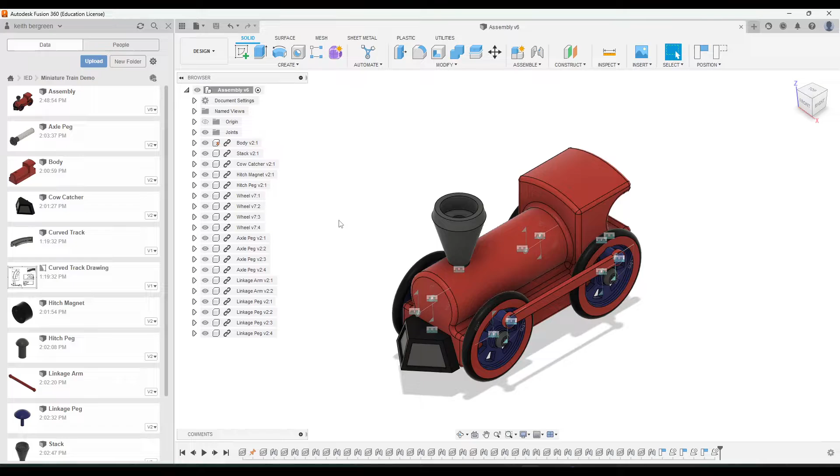So what I'm going to do is go up to File and go to New Design, and then I'm going to go ahead and save this as a straight track assembly.

Okay, and what we need to do is bring in one of our straight track pieces. I'm going to go ahead and click OK here, and then let's go ahead and ground this piece since this is our first one. This is just a 12-inch singular piece of track. Let's go ahead and get at least a couple more pieces on here so that we have a longer track.

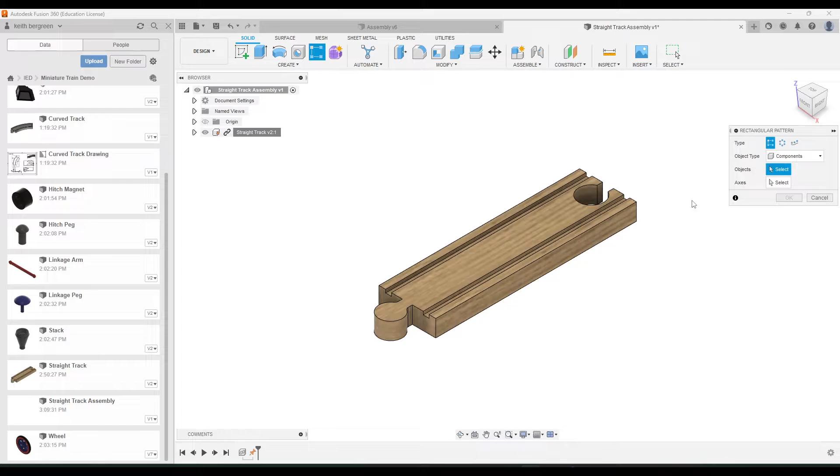So what I'm going to do is go up to Create, then down to Pattern, and then Rectangular Pattern. Under Object Type, make sure Components is selected. For our objects, I'm going to click on the track piece. And then for the axis, I'm going to zoom in here so you can see it, but we want to click on the axis that is going this direction, which in this case is the y-axis for me, or the green line. So I'll click on that.

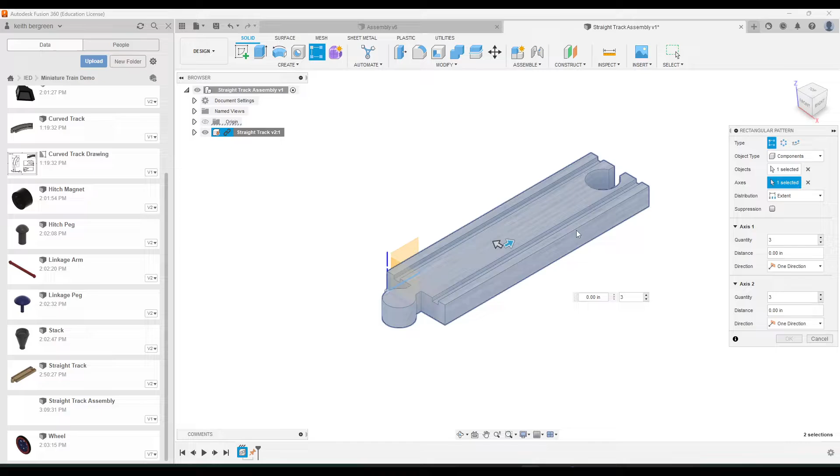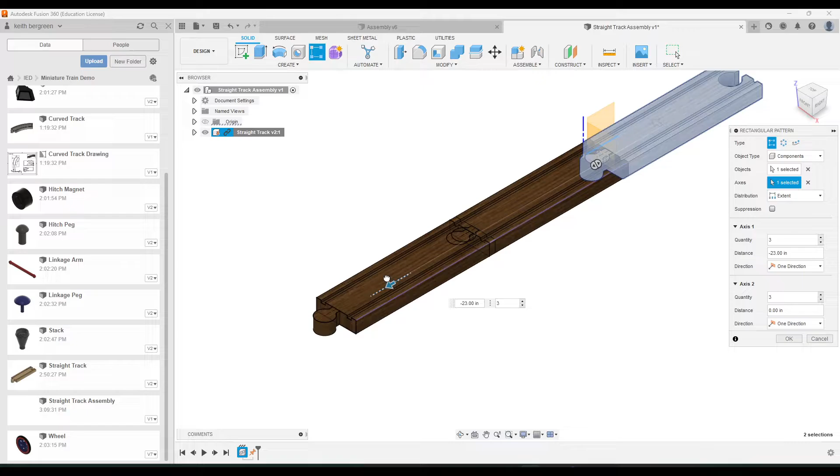By default, it's going to select 3 total, including the one we have. If I click this arrow and start to drag them, you can start to see the track pieces. But what you want to do is drag the pieces out to the end where this piece will end. Since I have 2 more, it needs to go out 12 inches, and then another 12 after that, so 24 inches total. You'll notice that one will snap together to the one we already have, and these two will snap together here too. Then just go ahead and click OK.

Now, one thing you'll notice is this puts them together and it looks like they are connected, but if we click and drag one of them, you'll notice they are actually not constrained to each other. We still can't move this one because it's grounded, but these other two are able to freely move. So I'm going to undo so that one moves back.

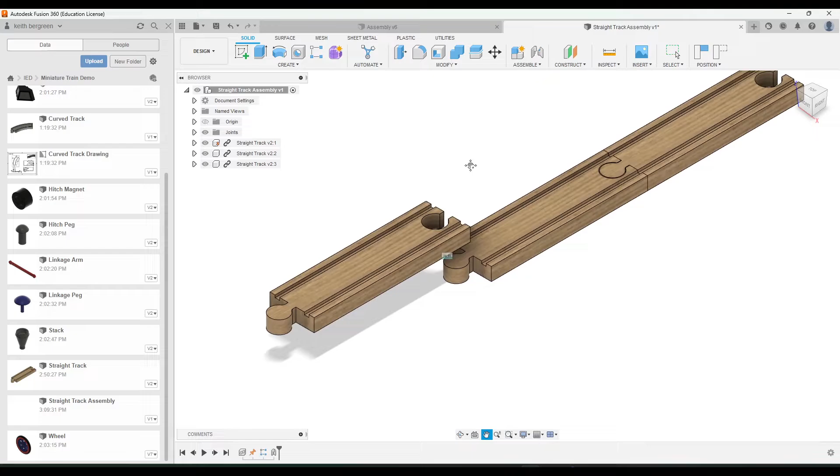What we're going to do is go up to Assemble, then down to As Built Joint. Here we can click on our starting piece, and then this next piece, and that will automatically apply a rigid constraint to these two pieces as they are sitting right now, which we know are correctly positioned relative to each other. We just need to lock them in place. So that's what this is going to do.

So now you'll notice we can't move either of these pieces. We can still move this one though, so we need to do the same thing for this bottom piece. Let me undo to move that back. Go to As Built Joint, click on those 2 pieces, and click OK. Now you'll notice that our track piece cannot move at all. Okay, so we'll go ahead and save that.

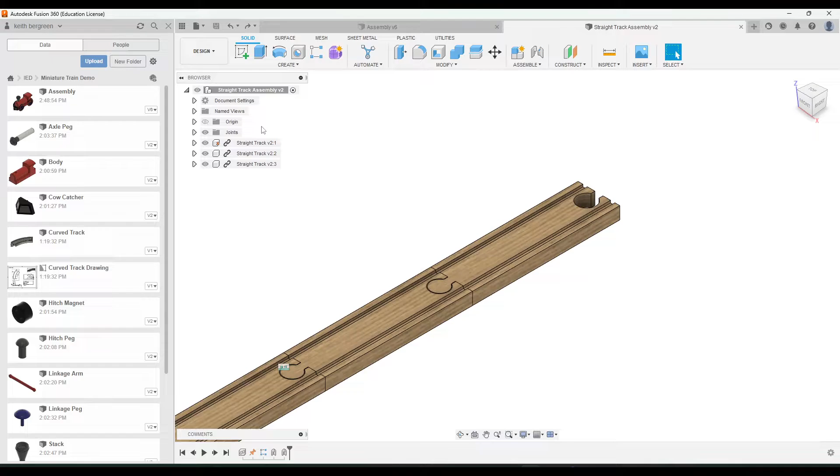And then let's go ahead and bring our train assembly in. So I'll click and drag that in. Oh, let me undo that—I don't know what just happened there. Click and drag that in again.

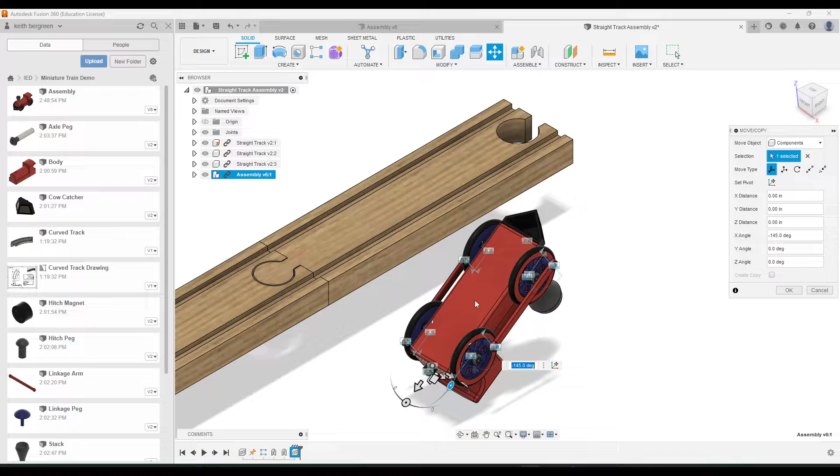So what I'm going to do is just drag it, and we're going to position it somewhere here in this empty space, not on top of the track. One thing that will be kind of nice is we're going to have to click on the bottom of the train, so if we flip the train kind of upside down—it doesn't really matter what angle—just some angle so you can see the bottom, because we're going to need the bottom surface of the train for a joint. So go ahead and click OK like that.

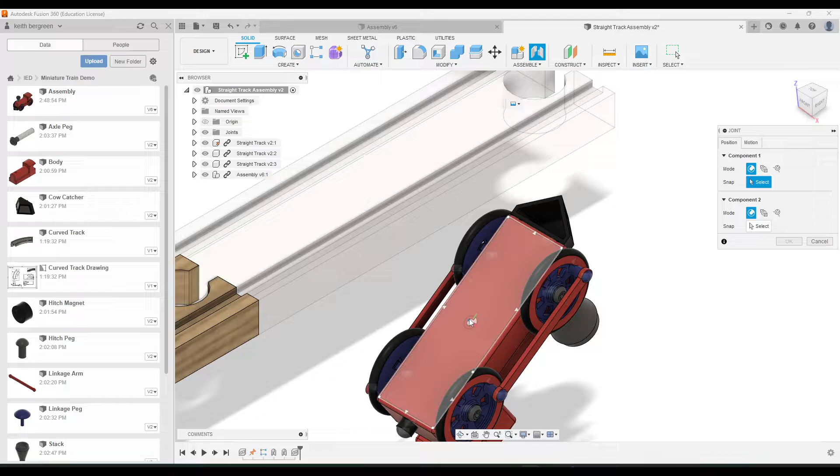Then what we'll do to position the train on the track is add a joint, a slider joint, because obviously the train is going to move and slide back and forth along the track. We'll go up to the joint tool, and then select the middle part of the bottom of the train right here. Then I will click the middle of the track piece right where this dot is, the middle of the top of this first track piece.

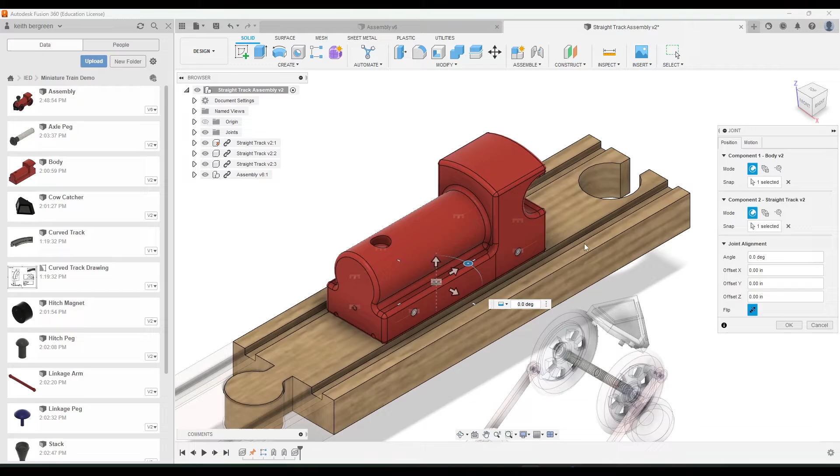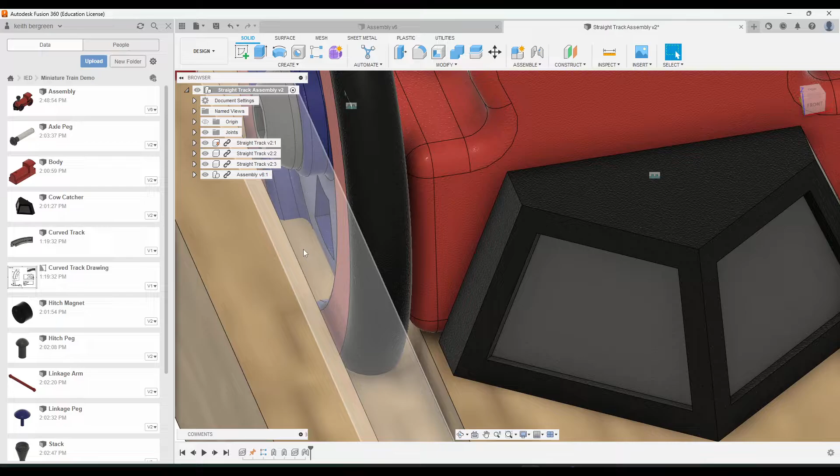You'll notice that it'll just move the body—the wheels and all the other parts are going to be over here. That stuff is all going to move after we finish setting up the offsets and other options for this. One thing you'll notice, if I click front here, the train is just kind of resting on top right here. And if we were to click OK now, notice the wheels all move into position, but the wheels are kind of cutting into the track.

And you can kind of see the top part of the track there going above the wheel. So we don't want to do this the way it is with the train just resting right there. We want to lift it up off of the bottom a little bit.

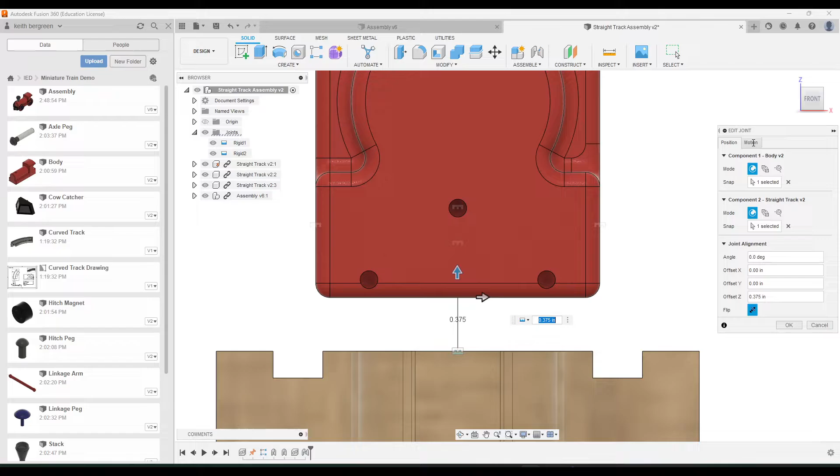So I'm going to go back into this joint, right click on it, go to edit, and then we want to lift this up a little bit. And the value that we want to use is 0.375 inches for that.

And then, like I said before, this is not going to be a rigid constraint. We want to use a slider constraint. So let's go ahead and change that option, and I'm going to angle it so we can see what direction it's sliding.

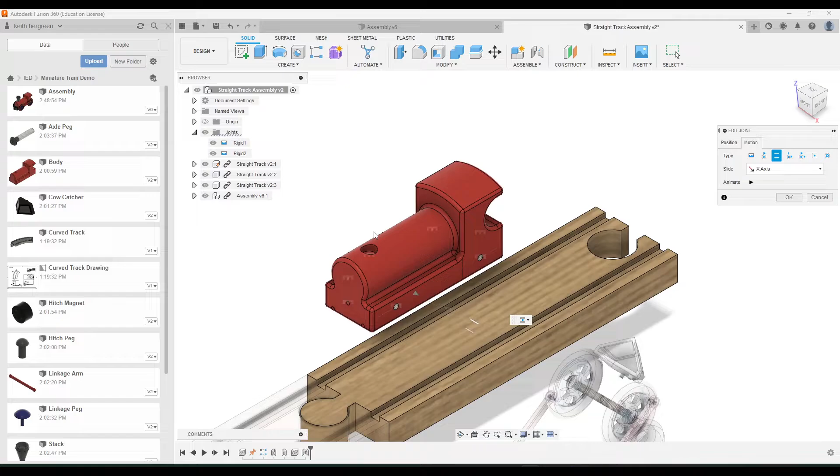So if I click animate, you'll notice it is sliding up and down. We do not want a train that slides like that. So let's try to pick a different axis.

We choose x-axis. Notice that slides kind of left and right from the track. Again, that's not what we want. Let's try y. That is how we want the train to be sliding and moving on the track. So we're going to select the y option for that.

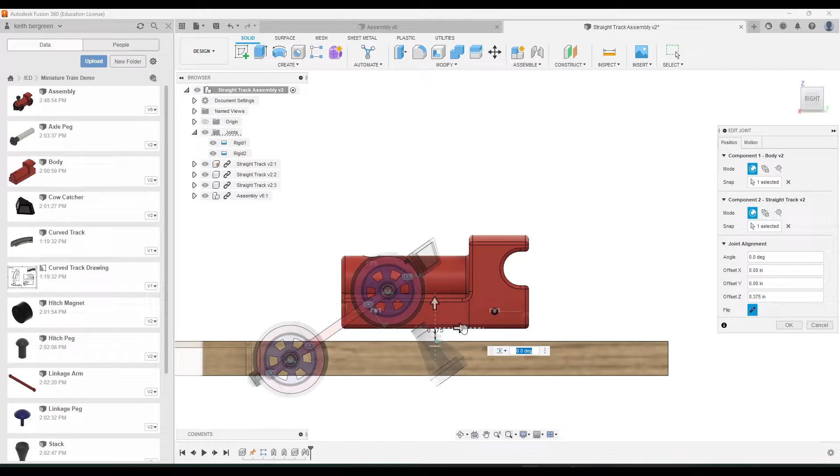And then the last thing that we'll do is let's go ahead and move the train so it starts toward the back part of the track rather than in the middle where it is right now. So I'm just going to click this and kind of move it to the back. We move it about 3 inches back or so, so that it's toward the back part of here. And then I'll click OK.

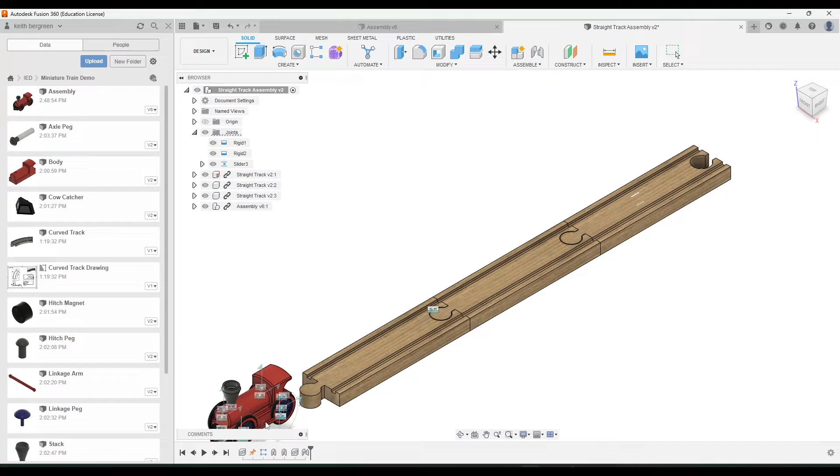And I think that looks pretty good. So you'll notice right now you will be able to slide the train back and forth. Notice that it can go off of the track. It goes off the track right here, and it goes off the track right there.

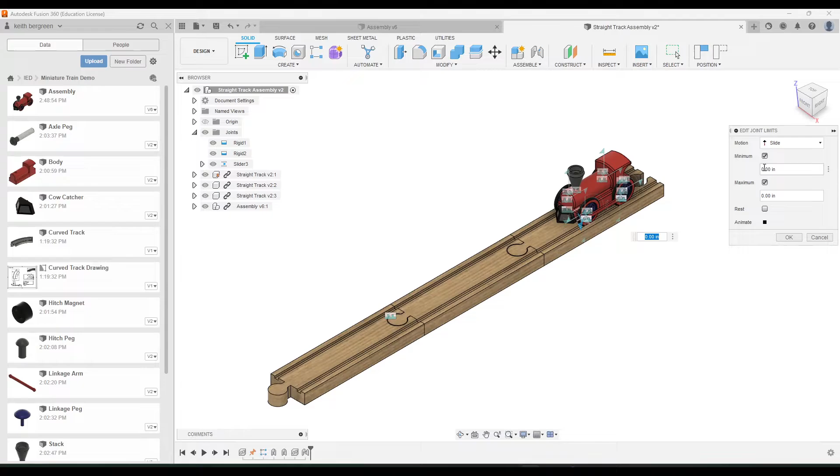So similar to what we did with the selfie stick, we're going to add some constraints to it. So we'll go over here to where our slider constraint is and then click our joint limits. And then we're going to want a minimum and a maximum.

So for our minimum, I believe for mine, negative is actually going this direction. It's going forward. So let me just test that. I'm just going to type in negative 30 inches. So notice negative 30, if I click on this, that goes pretty much right to the end.

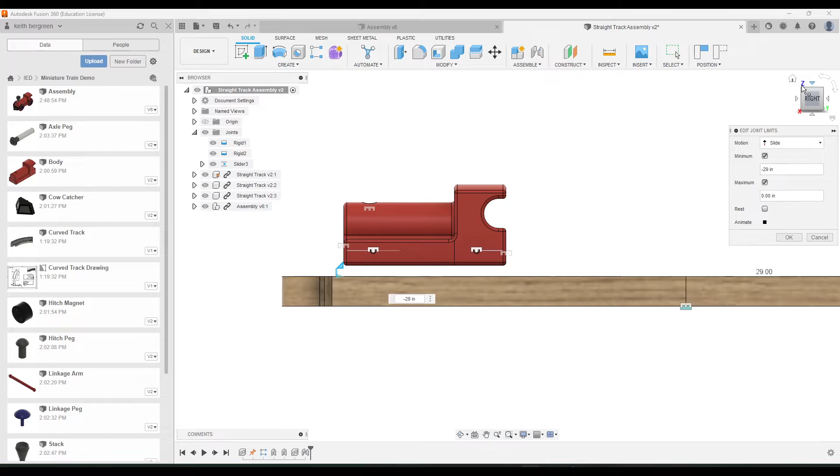It might go a little bit too far. Maybe I should make that like 28 or 29. Let's see. 28's a little short. 29 I think is pretty good. So we'll go 29. And then maximum I believe is just going to stay at 0, because 0 would be at starting position right here.

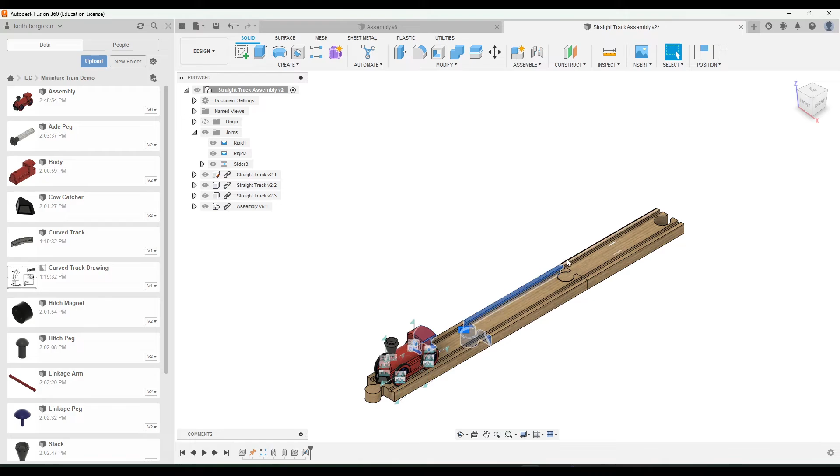So we're just going to leave that and I'm going to click OK. And then we're just going to try and drag it again. Notice when I drag it, I can't drag it any further past that right there. So that's good, it's locking there. And I can't drag it any further past this. So it looks like our limits are set correctly.

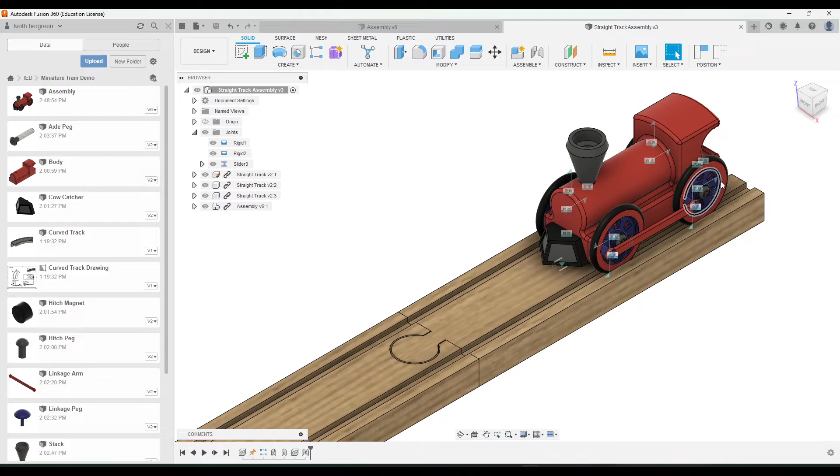Okay, the last thing that we're going to do, and let me click and drag this so I can animate it, is we're going to add another motion link similar to what we did previously, so that we're going to add a motion link between the slider and one of the wheel revolutes, so that as it slides down the track, the wheels also turn.

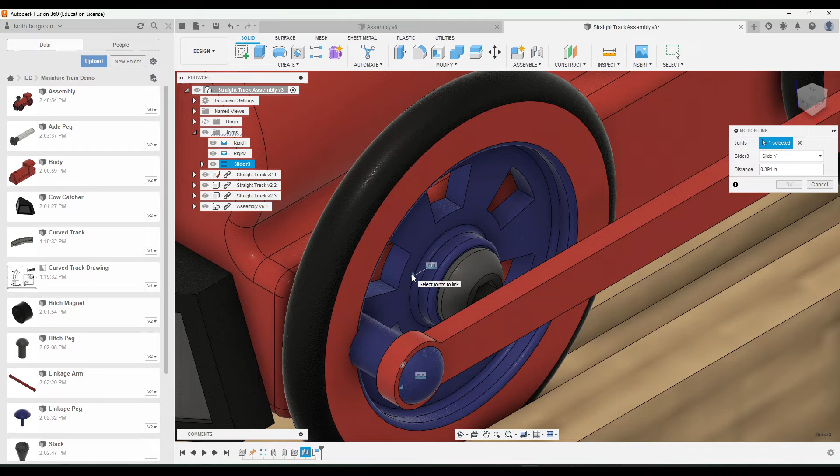So we'll go to Assemble, Motion Link, Capture Position, and then we will go ahead and click on our slider that we just added. And then I'm going to zoom in here to this front right wheel, and then we'll click on this constraint right here, the revolute that is between the wheel and the body. Okay, and you'll notice that it will start turning and moving down the track.

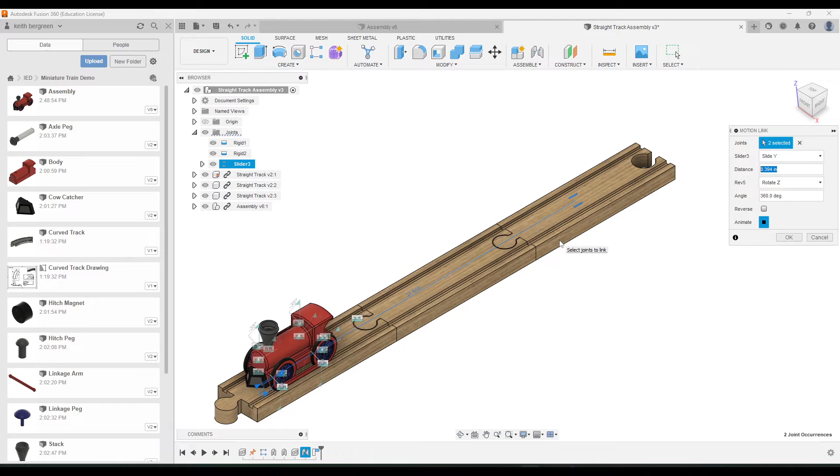The distance that we want to set here, so we want to figure out the distance. So as the wheel turns once, what is the amount of distance that it goes forward? And what that will be is the circumference of the wheel. So to find the circumference of the wheel, we just take pi, so 3.14, times whatever the diameter of the wheel is, and that is 2.25 inches for this.

And if you notice, it's kind of hard to tell because mine is moving pretty quickly, but if you notice the direction that these are moving in, when the train is going this way forward, the wheels are moving forward. When the train is moving back, the wheels are moving backwards, which is what I want.

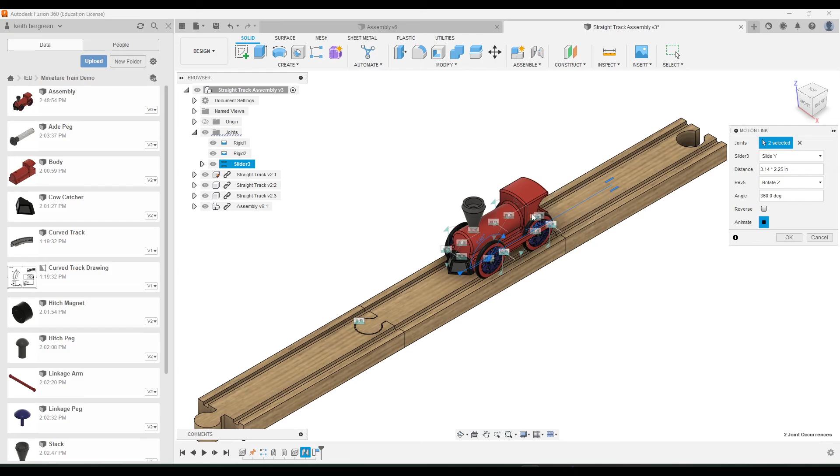But if you need to reverse it, you can check that option if your wheels are not turning in the correct direction. Mine I do not want that checked because I can notice, even though it's moving kind of quickly right now, that it is moving in the correct direction with that unchecked. Okay, so go ahead and click OK.

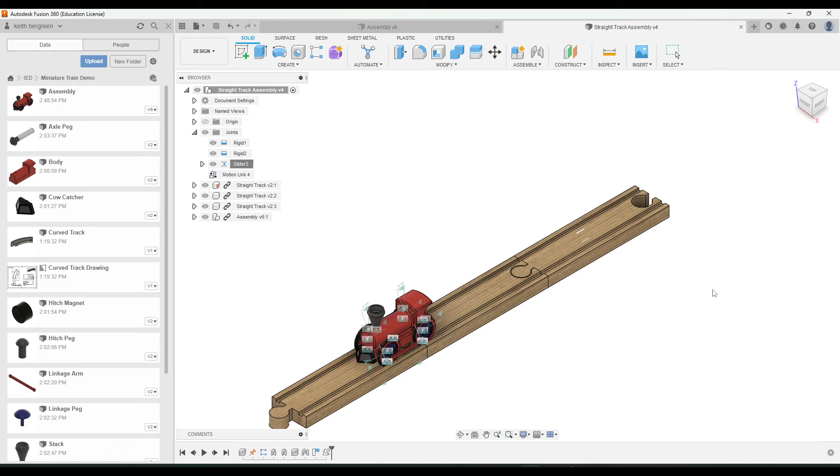And then if you want to animate your train to see that again, what you do is you just right click on the slider and go down to animate model, and it will animate your train. And that is how you assemble your train and animate it to get it to move along the straight track piece.